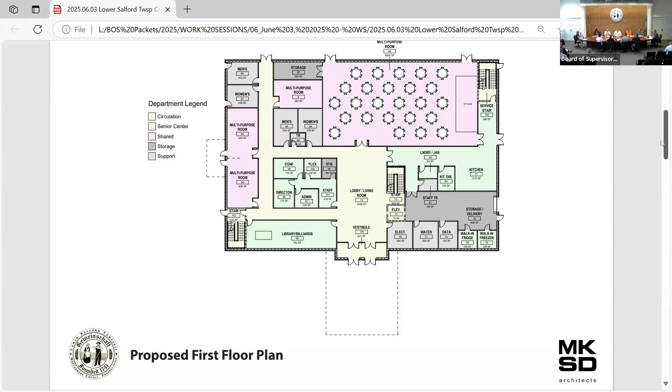We'll turn it over to Paul to talk about the site plan, since this is new information. For the site, as you can see, we've lined up the main entrance with Community Avenue so that there's clear traffic flow. We have a handicap area over to the right of the new proposed building.

There'll be access for deliveries, and also a throughway for drop-offs close to the handicap area. There's a pull-around area with a loop that can take you to the new building. We're looking to demolish the existing pool area that has the main entrance and put a new one there. Further to the left, there's a proposal to remove what I believe is a basketball court for a new pool system.

Further to the left, there's a new pool house. Throughout that, we're adding and improving the walkway to improve walkability to all these facilities. With this layout, we're shifting the fencing and the baseball or softball court further back to allow room for additional parking and the additional building.

This does increase the parking lot spaces. If you look to the far right there's a count - unfortunately it's awfully small and I don't have the amount memorized.

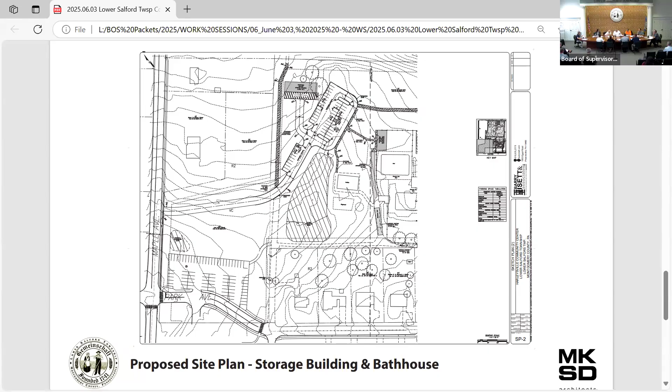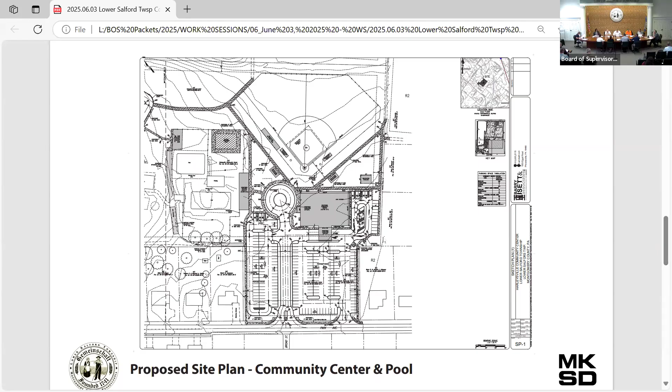The traffic circulation on the ADA spots is a concern. Two items: I know that's also going to be the delivery zone. It'll be more the delivery zone in front.

They won't be backing into that area though. So they'll pull underneath the canopy. And yeah, park, correct, and on the... correct. Okay, so there's no dock needed. Correct, right, it's flush.

The other question is the sort of crisscross nature of the traffic, because they're coming in to make the circle, going backward, sort of counterintuitively. That strikes me as difficult for most drivers. We can look at, does it make sense to recirculate it? We could re-angle the spots and recirculate it the other way. Just because you don't want to see that traffic crossing each other.

So the idea for delivery is they'll come in on the secondary access off the Park. Correct, turn under the overhang and just sort of park out there in the morning and deliver before the rush. Right, okay. We do have an overhead door located off the kitchen, so they'd have to go around the building. That's what they're doing, they'll park, walk up that sidewalk and come in the overhead door. Correct, they're not going to try to make a turn around that. No, there's no way, no.

And per our discussion, right, that's kind of what we just said, that'd be the way they do it. Right, correct, for trash disposal and stuff. Same kind of thing, yeah, you see the trash, it's like one Northeast of those. It's hard to probably see, but it's to the right, to the right, dumpsters from the right. There you go, right through there. Yep.

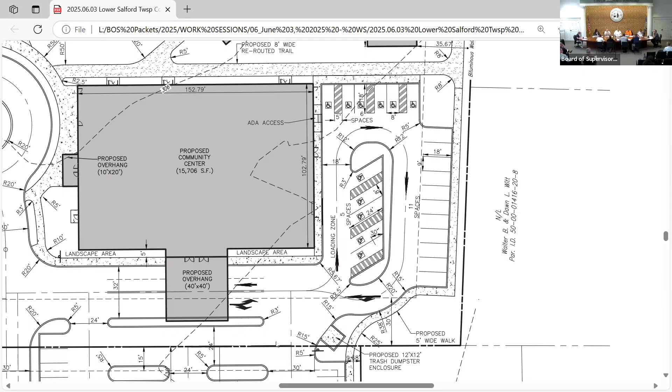Right, it'll be first. If we can do the semi, I can do the emergency vehicle. Gotta ask, yes. We'll definitely confirm that with the fire folks. I like this, but I'd like to make sure we could see the turnaround and stuff. Yeah, sure, that'll be our next steps.

Focused on this a little bit. I know trash dumpster pads are always a terrible spot anywhere. We're gonna build a beautiful building, presumably, and we're going to have a lot of guests coming there. As you're walking up to it, the dumpster will be right there. The enclosure, but I don't care how pretty an enclosure is.

I understand, but I thought, you know, from the ADA spots and other things, my thought would be that you'd eat up the first two ADA spots at the end of the building. They can pull straight in, grab it, put a little dumpster enclosure there, and back out in the morning, just how a lot of trash companies do it. That buries it in the back rather than being right at the entrance.

Easy access into the building too, you don't have to cross the sidewalk. As far as code, we're fine, but because it's a senior center, we added more handicap areas. I think it's what you feel comfortable with.

I don't know what everybody else thinks, but I think we'd be better off with the dumpster buried back there, and then they can pull forks in and go straight back out. It's only gonna eat up 2.5 of those spots, even if we have to rejigger that a little bit by re-angling it. Sure, we can play with that a little bit.

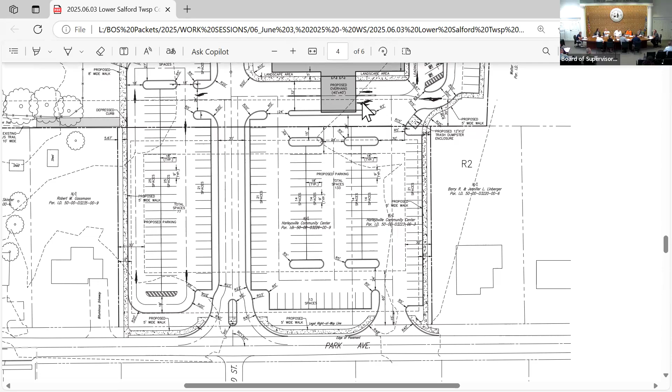I think you're going to find a lot of people end up using the second entrance anyway - if they're just going in to park for soccer or whatever, they're not going to loop around, they're just pulling right through. Is the traffic under the canopy in two directions? It is, yes. And that's pretty wide. It's 40 wide, so...

In Paul's defense on the parking spaces, I asked him for maximum parking spaces, working the event we need. No, that's fine, that's what we're looking for here. Because you guys definitely see during the events and all that, and unfortunately we don't always have those.

During the initial stages of this design, we're going to be going back and forth - there's going to be a ton of changes. Yeah, this is just conceptual, and then when we get to the design phase, things sometimes change based on what we see.

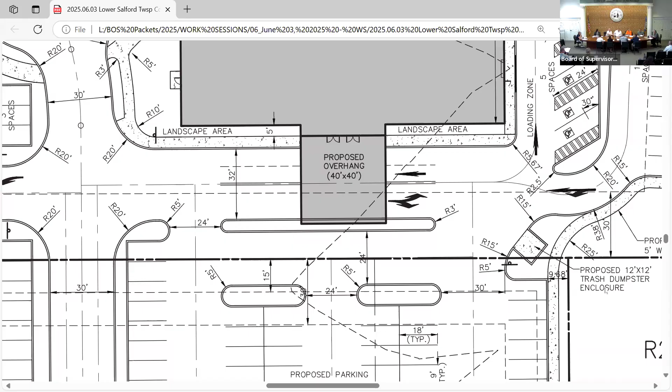I don't know whether Chris, Ken, Joe, or Doug has mentioned this, but the intent in that circle is to put something pretty special in the middle there, so when people drive up it's a focal point - whether it's a flag, a monument, or whatever - the intent is for that circle to be pretty cool.

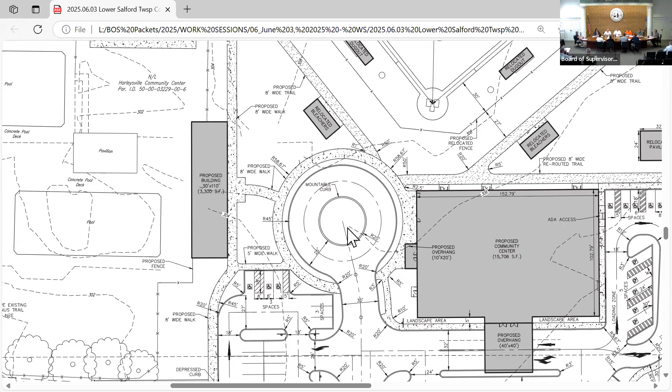Just on the schedule - whenever the board decides to move forward, these dates can shift depending on the word go, right? So at this point we've just assumed some things, but again these are milestones that will fluctuate as the township decides to move forward with, if anything, the center, the public works we've already discussed previously, and the impound, if that's still on the table.

So, have we got this nailed down to a point where - I know it's very conceptual - but is it conceptual enough to get the budget as anticipated cost? Yeah, we can do that next, which would then be our opportunity to evaluate funding streams for this - grants, partnerships, the senior center, and other people who will also be participating in the cost of what would be a very nice project.

So would that be our next role in this? And then once we have that conceptual budget nailed down, we can make decisions about moving towards hard design, hard CDs, things of that nature. Right, that's it, okay.

So what would be between now and September 2026 - we were just talking about schedules before we started this meeting - that's a nice window of about 15, 16 months. How many months are we talking about between now and when we could have numbers?

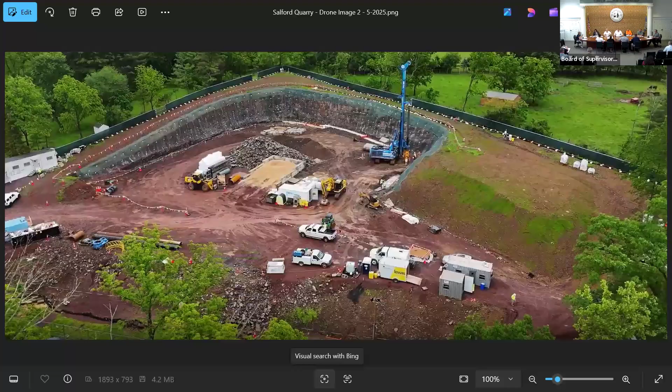So the blue machine in the picture, that's their large diameter drill. So they're drilling, they've stabilized the excavation in the wall so that they can work safely.

And then along that, the foot of the base of the wall is where they're drilling the wall or piers that they're putting in to prevent the groundwater from contacting with the contaminated groundwater that's on the site, and it will essentially go around the site so that any contamination won't migrate off site.

So refresh my memory, inside that wall that we can now see, what's the finished condition? The wall's exposed and they just put soil over top of it — is that the bowl there, or are they planning on filling it back to the original grade? So they're gonna create a slope in there, and basically any evidence of a depression will be gone. That's my understanding, I think.

How do you use that — for example, I think the wall height's probably about 25 feet. And I don't know how far down, I forget how far down they're drilling to put the perimeter barrier in, but...

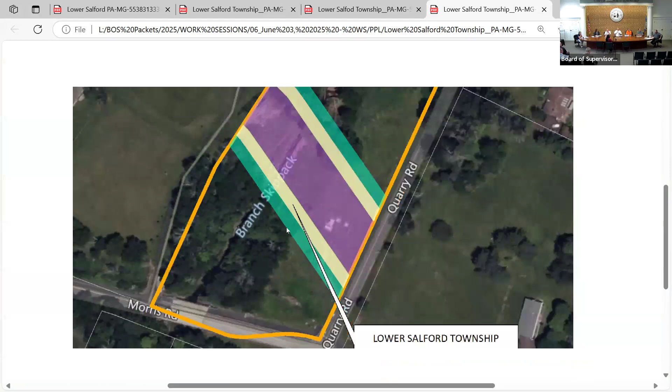By industry standard now, for a 230 kV line, we do a 150-foot easement. So whenever we do a rebuild, we try to optimize the line anywhere we can. We have a 10% design right now, and we're about to do an edit to that 10% design at the end of June. We're thinking construction starts in January, with environmental and safety measures starting at the end of 2026. So when you see me at this point, you'll have me for 2 to 3 years—we'll be best friends.

What we try to do is go through and identify parcels where we could potentially do these land swap agreements, because we can't do them everywhere. Some parcels back against neighborhoods, and we'd need every single person to sign, so in those cases we just add an additional pole. What we're trying to reduce is the number of additional structures we have to add. I live in Macungie, and nine years ago they started one of these projects without doing this, and we ended up with a pole every 50 feet, which didn't make people happy. That's why now we do these land swaps, to give people the opportunity.

You'll have long spans, so you'd need another pole if we didn't amend these easements. With the amendment, the setback areas go back to the landowner—that's the green area. The amended easement would then extend to 150 feet, shown in yellow.

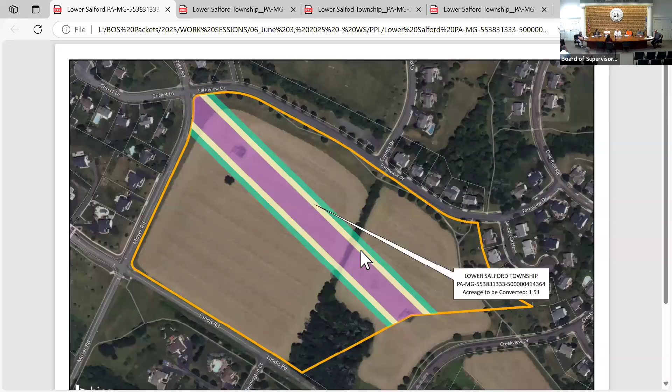In the yellow area, full disclosure—this fine young lady and I have had multiple discussions. We're still waiting on our survey. The outcrop of that colored area is property that my wife and I have, so we're negotiating.

What are the restrictions—is it a no-build zone? We still own it in the area from the purple to the edge of the green. Once that becomes yellow, what additional restrictions apply? It's basically the same no-build zone.

I did have a talk with Andy—he was worried about encroachment, things like new trails, ball fields, and other uses. We have an encroachment process that's really simple. There's one specific woman, Janet, who handles the encroachments. I always tell people, if you hear from someone random at PPL that isn't me or Janet, call me first. You can apply for an encroachment for trails, fences, anything like that—it's never an issue.

We do have some language that I think can get approved to be put in the easement. That's why I don't have the easement today—PPL Legal is working on it, but I think they should be done today.

So I'll bring all the copies for your meeting tomorrow. And all it basically says is, if you need an encroachment, contact PPL.

I guess the only thing I would have is, if there was any encroachment that would not be allowed by modifying the agreement. That's already existed, so would that be grandfathered in?

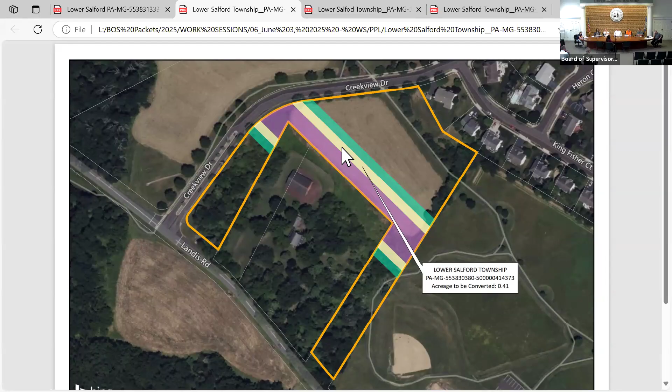I think probably there's about 300 owners, but in terms of easements, it was like 168 that would be affected. But that's because of some of the neighborhoods—we are talking to 60 landowners, because that's more realistic.

With the neighborhoods, if one person doesn't sign, we might have to put a pole there anyway because we can't optimize. So we always look at the parcels where this is a long enough span that they probably will have to get something, but they own the whole span, so we can optimize there.

So just to make sure I'm clear, you're taking the larger structures and going in? Yeah, so we're going down to a monopole. Right now we have the big lattice towers, and ours are a little bit wider than PECO's.

They are all foundation poles. It's a single circuit, so we'll have an 8-foot base of concrete, and then the pole sits on top with these giant bolts. Apparently they're meteor proof—I don't know who tested that to tell us that.

So we'll all be dead, but there will be electricity for whoever is still here. I was like, who tested that? I was like, what do you mean they're meteor proof? Yeah, I was like, who told you?

It's kind of like that lie where you're like, oh yeah. And you're like, how did you test this? Yes, the bolts will be there. And they're pretty sturdy.